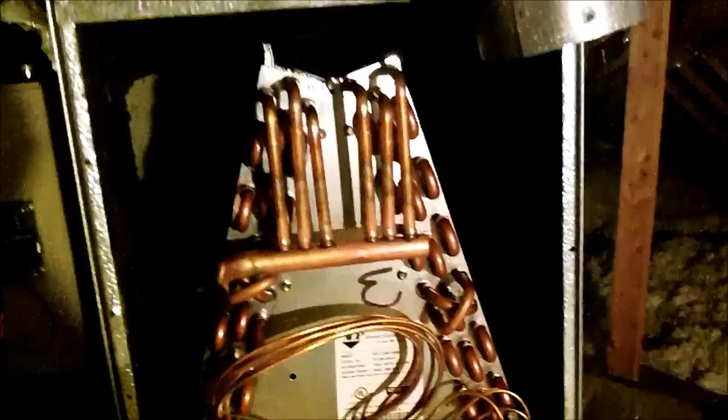Alright, there is a new coil in the old case, and I'll get the doors on and put everything together, and we will go back down there and get the torches and get moving on. See, the drain line is going to fit. Put a male adapter in there. Drain line is going to fit perfectly.

I'll have to put that. What I'll do is I'll put a piece of 3/4 in here and then slide that into the 3/4. That's about all I can do with it. And then the connection for the liquid line, and then we'll be good as gold.

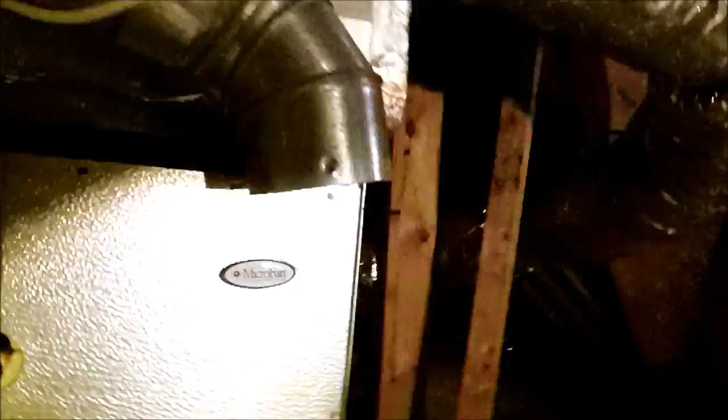Alright, so I got the doors back in place, the coil's in, and there is a gap here, but that's no big deal. I'm not worried about that, because what I am going to do is I'm going to take the old door, the old coil door, because it's already got screw holes, remember, for the top. These top screw holes, one there, one over here, and one on the other side.

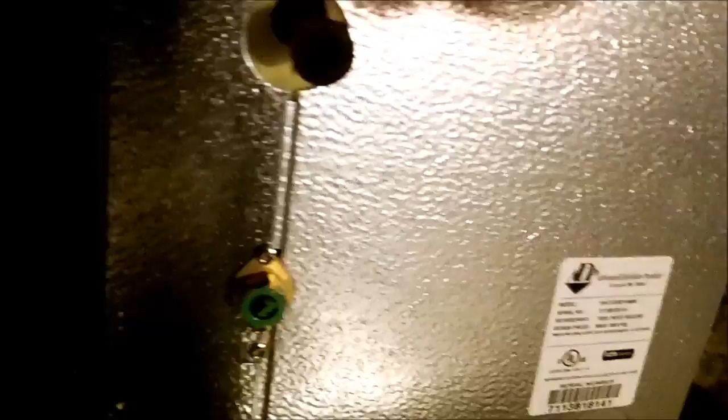And what I'll do is I'll just measure down to about right there, and I'll just draw me a line, cut it across there, stick it right there, screw it to the new coil door, and then tape everything up, and it will be good as new. And I ain't got to worry about hitting the coil because it's way back in the back, so we'll be good. No need to stress out about it.

We got it fixed. We'll have it fixed up and tape it up. You'll never be able to tell we were here. And I'll put the date on it. And hey, we got it made.

Oh, while I'm up here, before I go down there and get the torches, see if it's got pressure on it. It's got 10 pounds of pressure on it from the factory, so the pressure's good. They do only ship it with 10 pounds, and that's in the instructions. We'll show you the instructions in a bit.

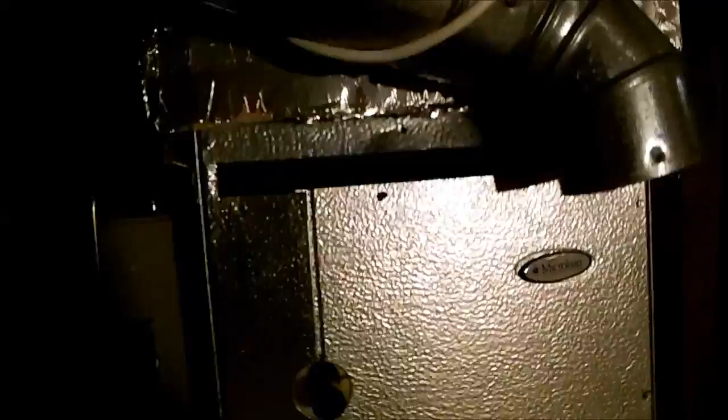Man, coils. After so many of them, you kind of get good at them. Anyway, let me go get my torches and little line set, and we'll go on about our business.

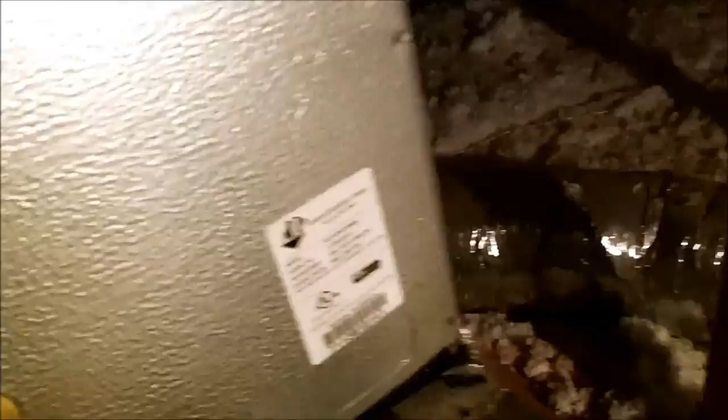Alright, so I got the front on, but I'm actually going to take it back off, because if I don't, what's going to happen is we're going to have a gap. See that gap right there? Where I can push it in. Remember on the new case, that top part that I unscrewed? Well, here it is. Right here.

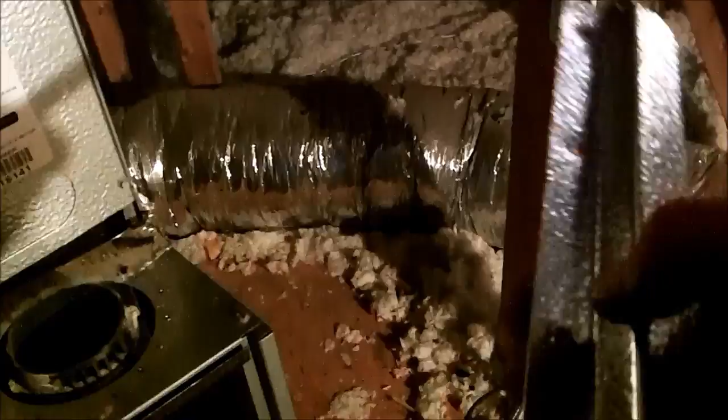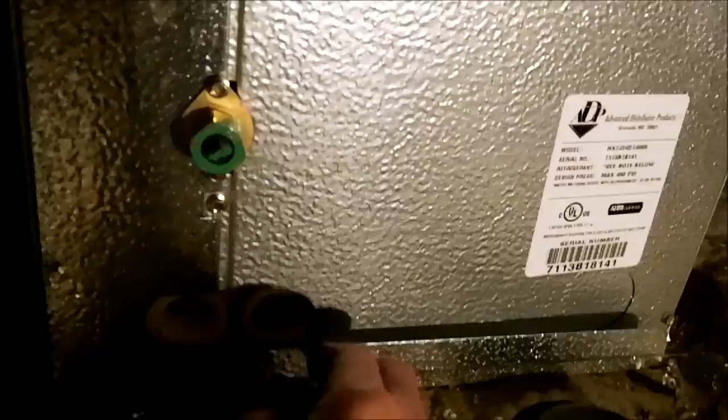And what I'm going to do is I'm going to take the door back off. I'm going to set this piece on the inside, notch it where the drain opening is, and that way we will have something to screw this to, and I'll screw this bottom part of the Z channel to the original case, and that way we have right there, well, you'll see.

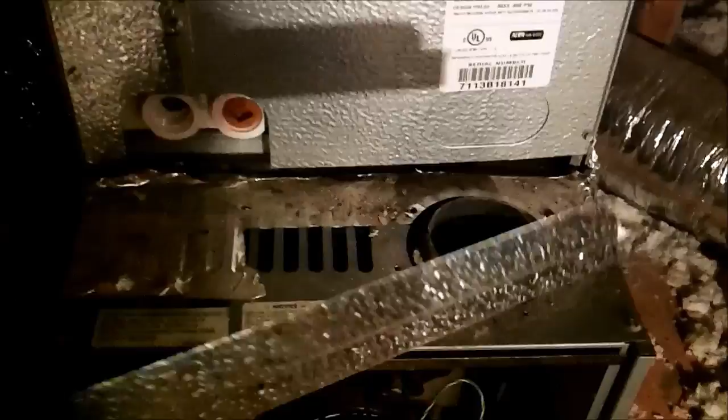Anyway, I had to use that part, so it wasn't trash after all. And I knew that I was going to have to do it, but I just wanted to put that on there and show you why.

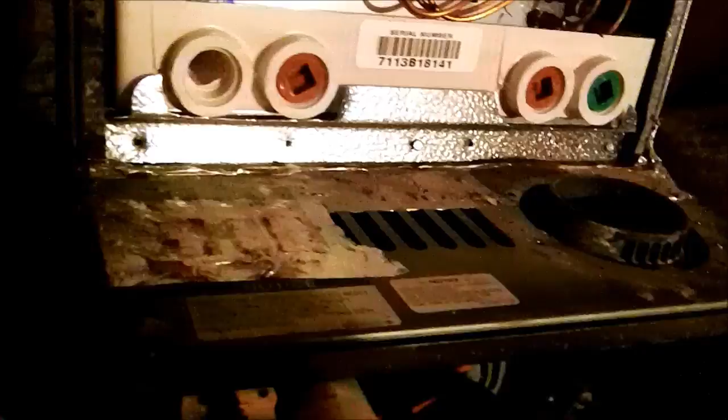Alright, so I got my bottom piece on here, and all I got to do now is just put a couple screws in it, and that's it, and then we'll just have a place to secure our door right there. So anyway, that's it.

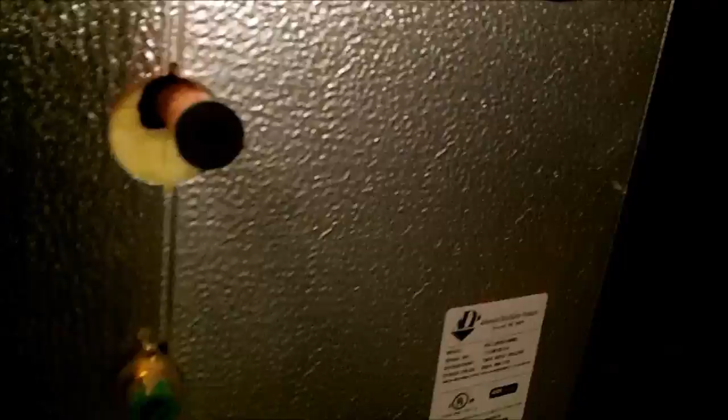Alright, so we got our door in place, our little bracket built, everything's screwed in place. So that's pretty much it. I just got to screw it in and solder it up, and then when the vacuum's being pulled, I'll come back up here and put this top part on and tape everything up, put Armaflex on it, do the drain, and we'll be good to go.

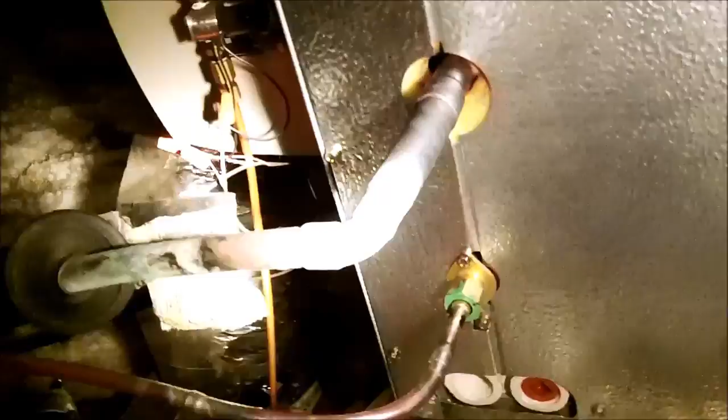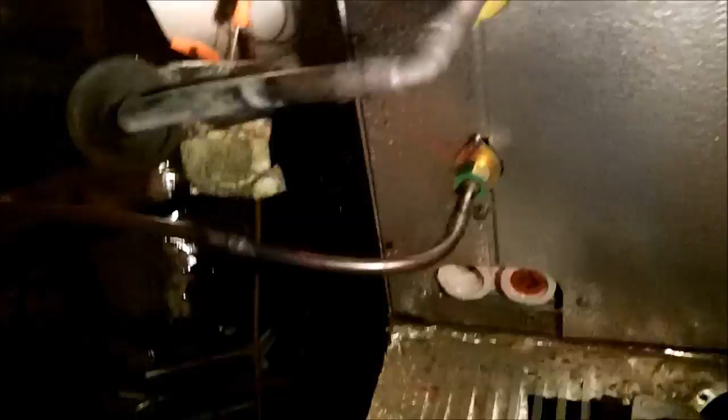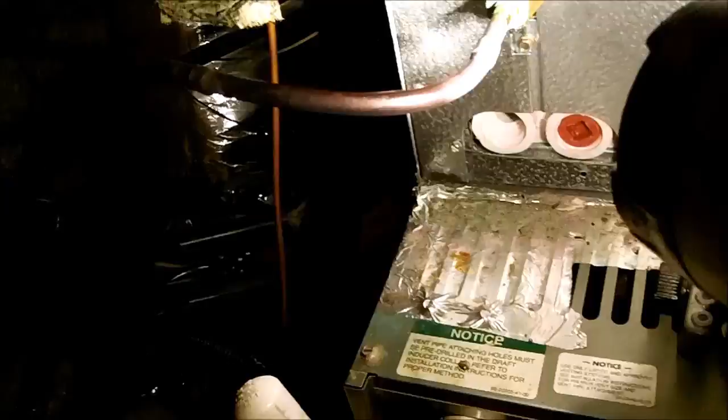Alright, so I got it soldered up, and I'm going to go down there and pull a vacuum, start pulling my vacuum and come back up here, put the rubber gasket in there, tighten the cap up there, and then make my top part and start taping everything up. And then by the time I get done with that, the vacuum should be pulled, and then we can add just a little Freon and start it up.

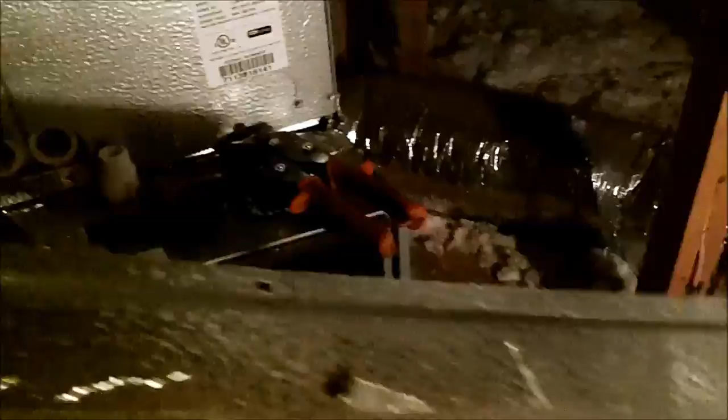Alrighty then. Alright, so got the vacuum going, got my new piece cut. And if you notice, I put a couple black lines right there and one over there, and that is where the coil is. So I want to make sure I keep my screws on this side of that line and that side of that line, so I don't have any chances of drilling into the coil. But there's my piece there. We'll put it up there. Once we get it put up, we'll do a little taping and everything will just disappear.

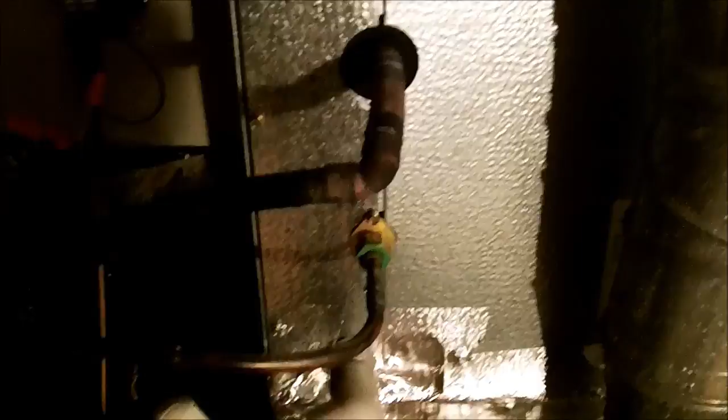Alright, I'll be back. Alright, so all I have left to do now is just go down, get some Armaflex and insulate the suction line. There's a coil. Like I said, you can't really even tell I was ever there, but we all know from the video I was.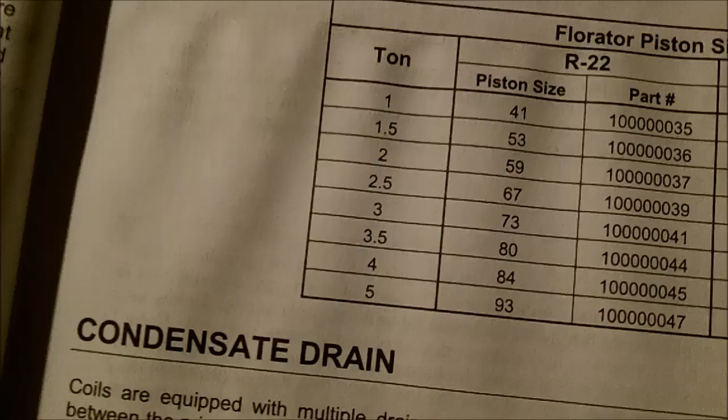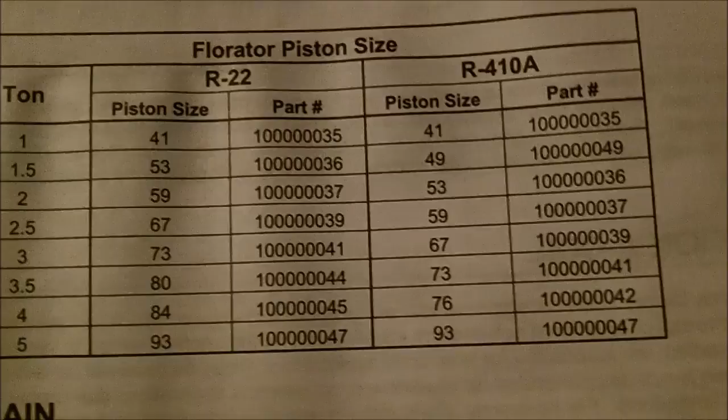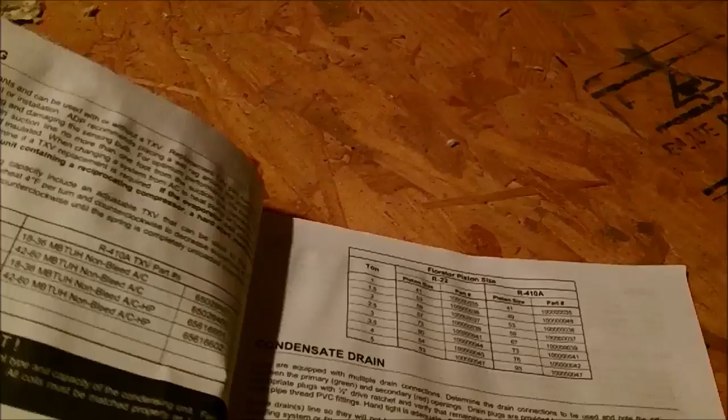And then it tells some installation instructions. It gives a piston chart for 22 and 410. On this unit, it's a 2-ton unit and it's R22, so it'd take a 59 piston. Now if I was putting this in on a 410 system, I'd have to put in a number 53 piston. But this supply house here where I bought this coil, if you need a 410 piston or 410 coil, it comes with a TXV.

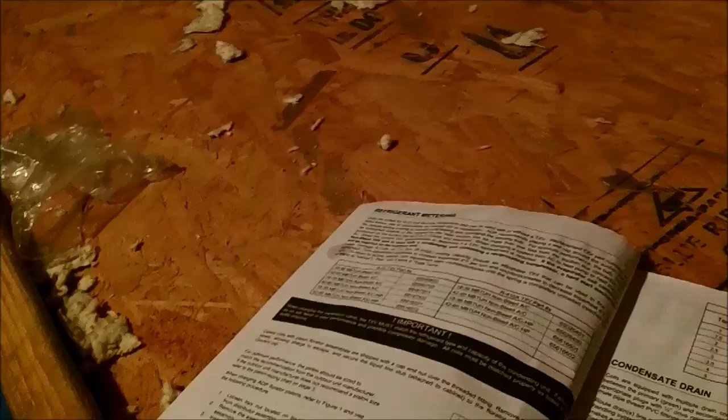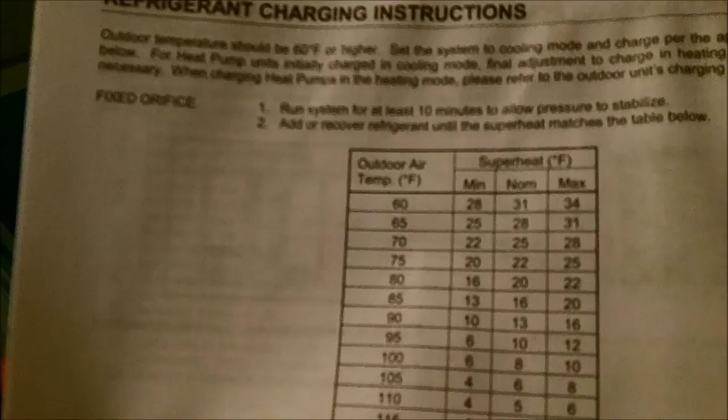And then it gives a superheat chart somewhere in the instructions here. It's on the back page. So, and then it gives a subcooling chart too. It's got a TXV on it. Let's see. We're probably around 65 out there, so the minimum superheat would be 25 and normal 28, and then max is 31. So we'll see what we get when we go out there.

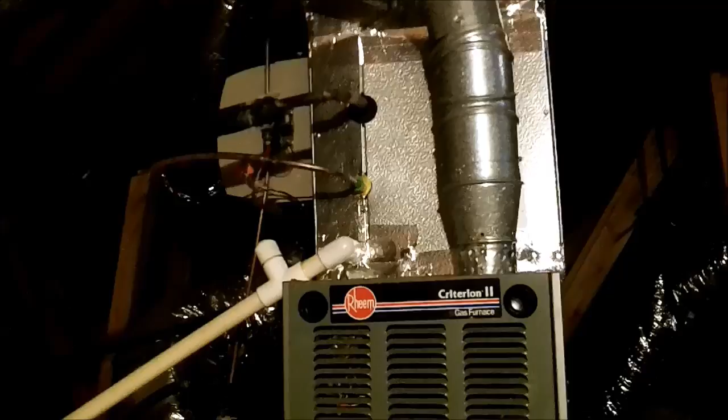But like I said, I'm done in here and just have to insulate the suction line and carry all my junk down. That's the only bad part about working by yourself is you don't have anybody to carry your stuff down. But it's all good. I ain't sweating it.

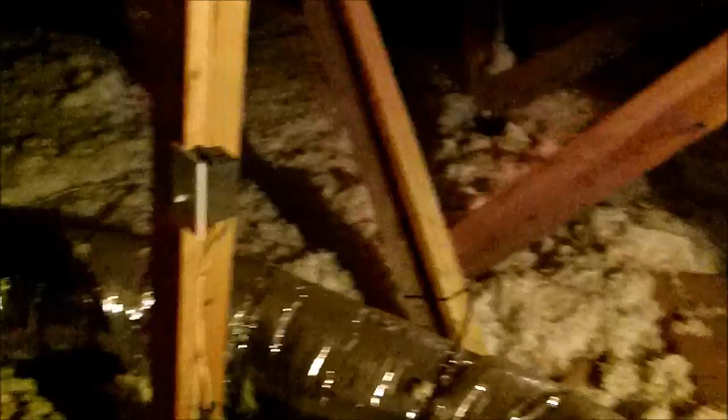Alright, so I got to just take my torches down the ladder. Got it marked 4-1 of 13. New evap coil. And got the suction line insulated. And we are good to go. I just got to come back up here one more time, turn the switch on, and we'll be just setting the charge.

Alright, I've closed the attic up, I turned power on up there, turned the light off. Now I'm at the thermostat. I'm going to switch it down to cool. It's 65 in here, so I've already got the vacuum pulled. Pre-charged the line because I know it was empty. So now we're going to go back to the outdoor unit, see what it says.

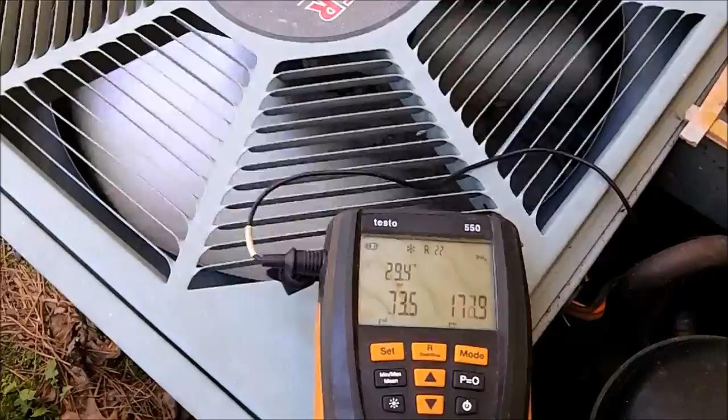The chart called for 25 minimum at 65. She's running. Alright, so right now we're about 30 degrees superheat. We're going to try to add some. Alright, I'm going to go ahead and get this thing charged up and turn it back on when it's done. So it's been running about 5 minutes or so.